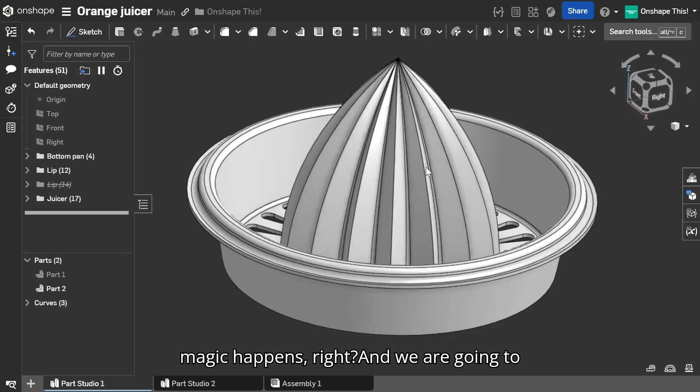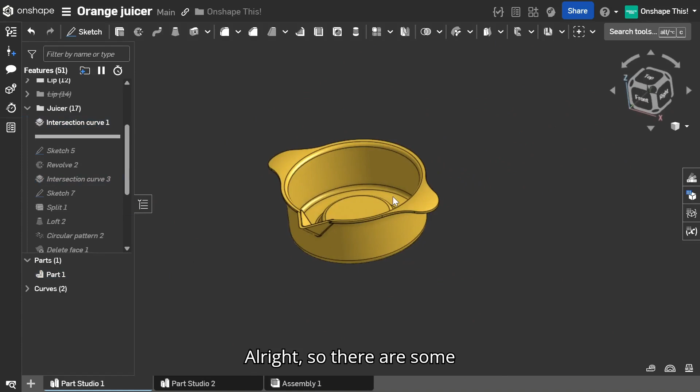Okay, so this is the juicer itself, this is where the magic happens, right? And we are going to be designing this together in Onshape. I'm just going to go back up in my feature tree here, like so. There we go. So there are some pretty complex features that I used here.

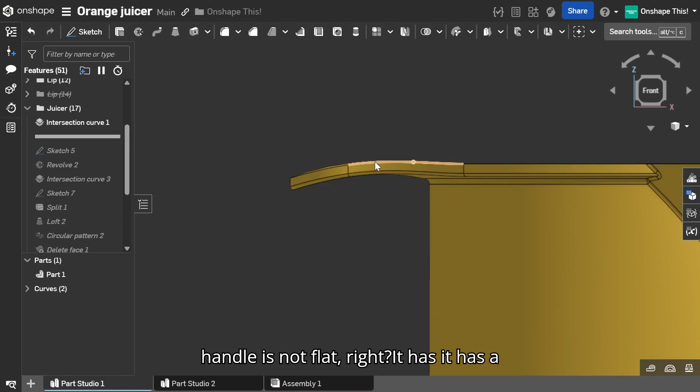Some of these are due to the nature of the design. If you notice, the handle is not flat, right? It has a curve, a slight curve, similar to how it looks on the product as well. So I needed some vertices or points to use, and I had to resort to using an intersection curve like you see here.

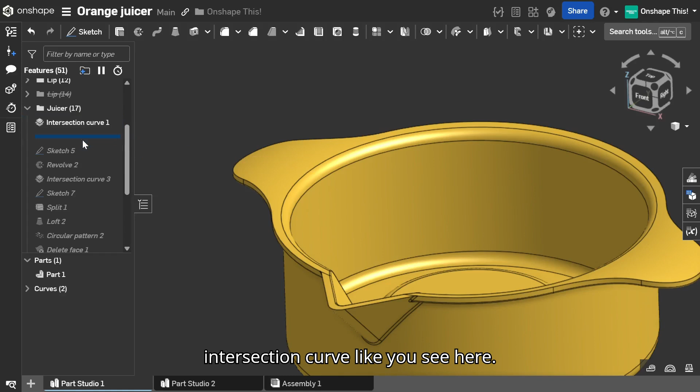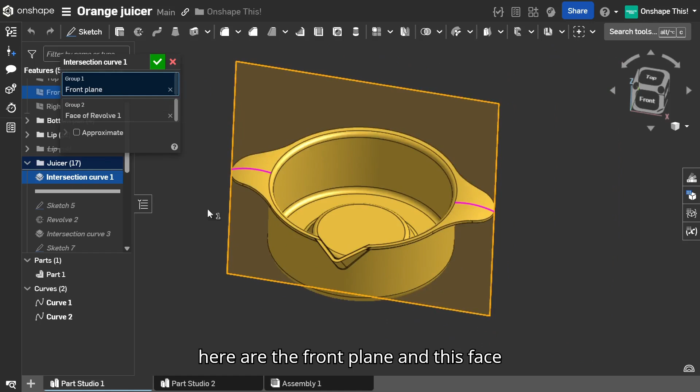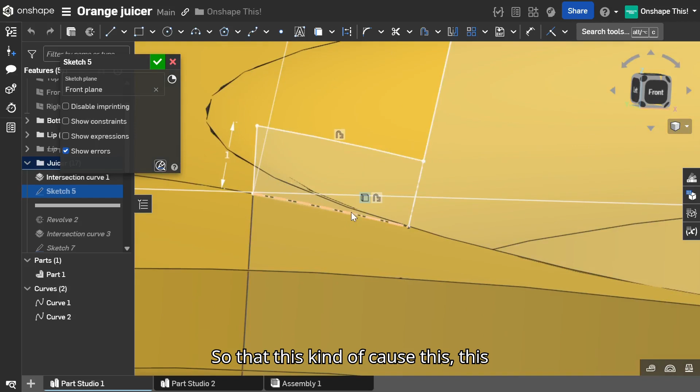Let me turn that curve on so you can see. What intersection curve does is at the intersection of two inputs that you give it, it generates a curve. My inputs here are the front plane and this face right here, and that generated this curve. I needed that curve for this sketch, because this here is an offset of this.

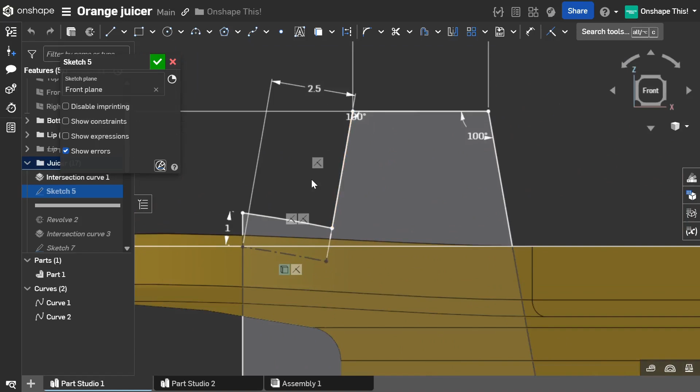Unfortunately I can't start from the beginning so as not to make the video too long, but you can try to follow the sketch. I'll try my best to explain what's happening. This is offset 1 mm, so that's why it's 1 mm. And we have this.

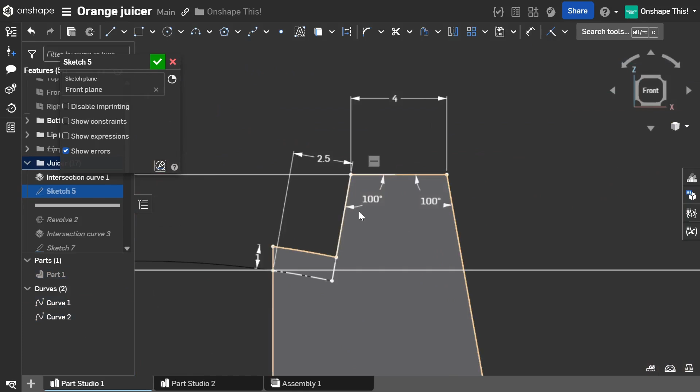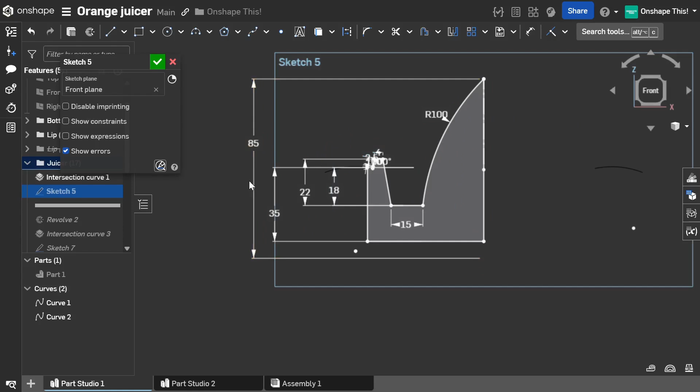Let me hide this part so you can see the shape clearly. 2.5, and this is 4. We have a 100 degree angle between these two lines and this horizontal, and the total height is 85 — I think we need to see where that comes from. Yeah, from the bottom of the pan to the very top is 85.

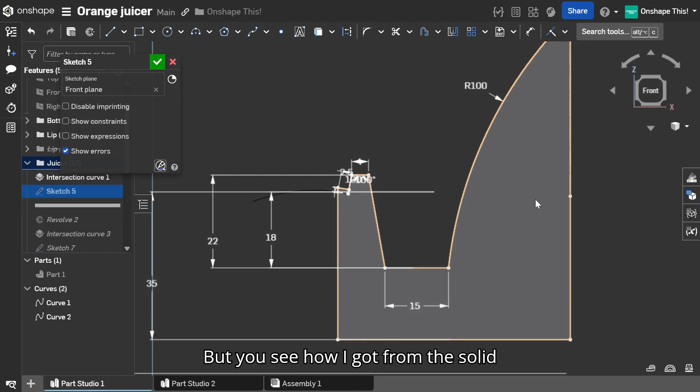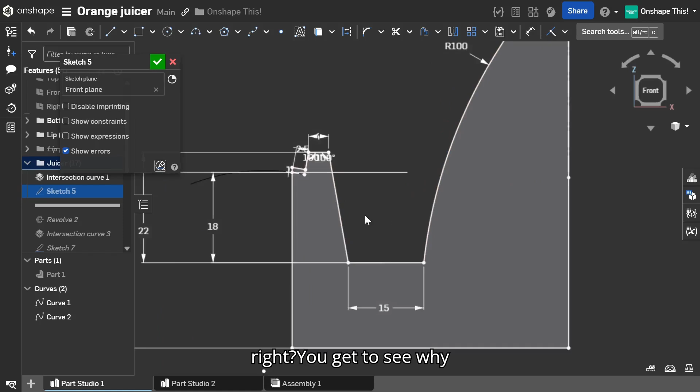I had to fill in all of this to make a solid, because I was going to revolve a solid. But you see how I got from the solid to the thin piece — basically a shell, but I wanted to use the shell command specifically. That's why I had to start with a solid, and that's why I did not just use the thin command initially. You get to see why later.

So this is a sketch, you can copy this, and let's get on with it. And we do a revolve — a solid revolve, basically. This is what we have. We hide the curves.

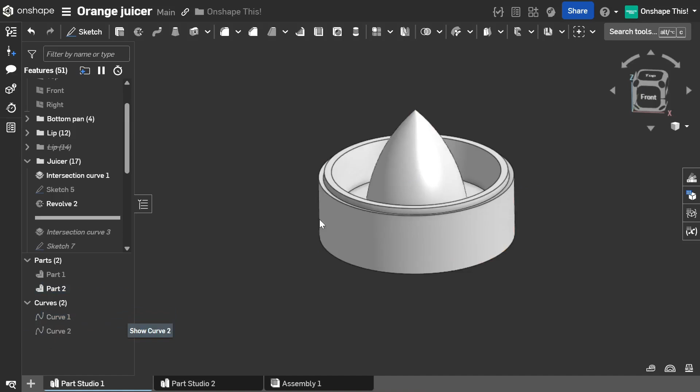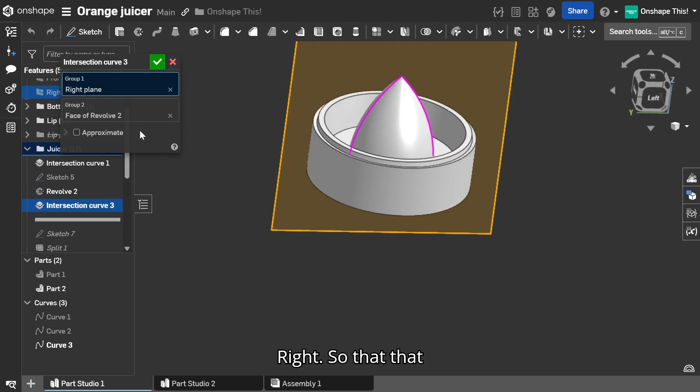And then another intersection curve, this time between the right plane and this face. That creates curves along, so that's that.

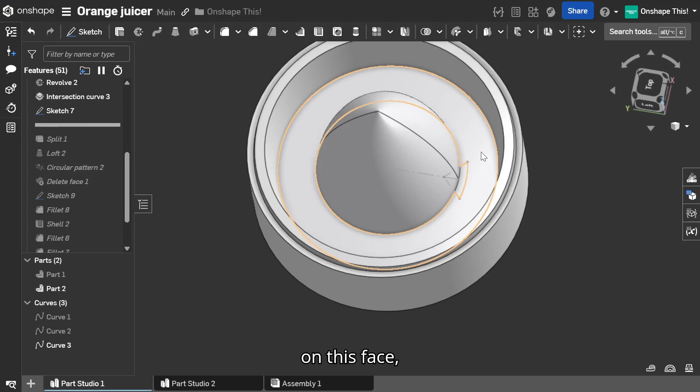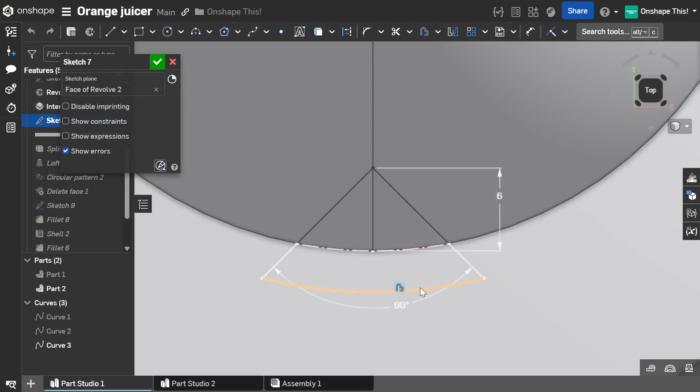And then we do a sketch on this face right here. So this is a triangle with a curved base. This curved base is basically an offset of this base here, of this circle, offset to here by any amount — it's 3 here. So offset, and then I trimmed out all the rest that I didn't need, so you get this triangle with a curved base.

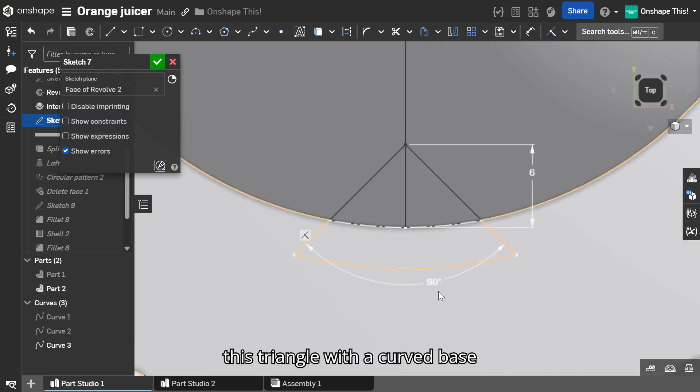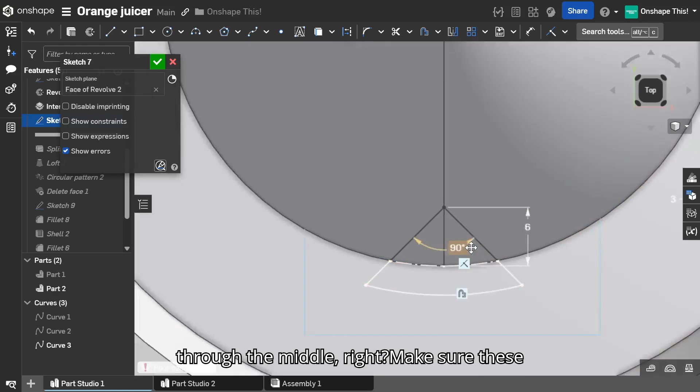90 degrees and then 6. At this point you can mess around with these dimensions — you don't have to use exactly mine, you can adjust them to however you see fit. But do make sure it is centered through the middle, make sure these are symmetric. This is a symmetry symbol in Onshape — make sure they are symmetric, and you'll be fine.

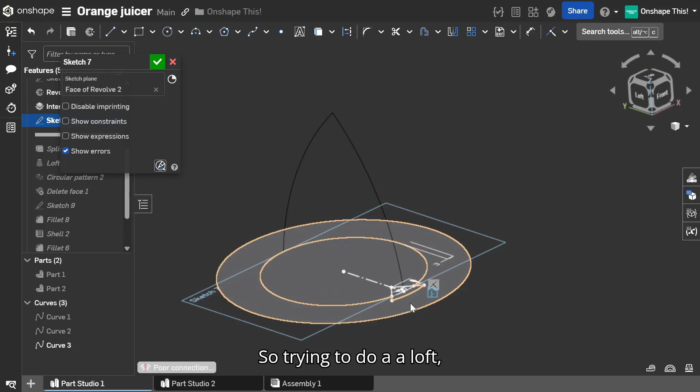Let me hide this part so you can see the sketch properly. You can probably tell what I'm trying to do already — I'm trying to do a loft, I think a loft in this case, to a point. That's what I'm trying to do.

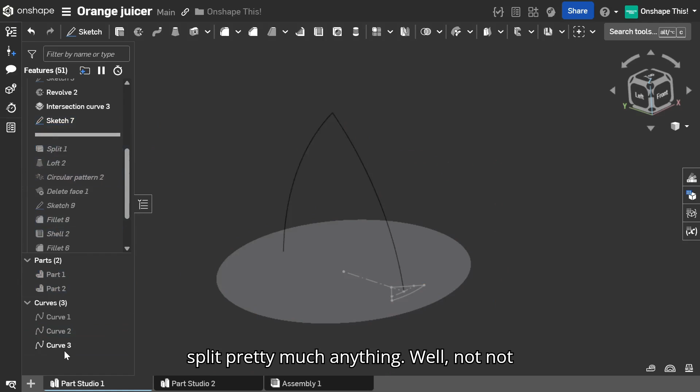So let me exit out the sketch, and I had to split the curve — it's wonderful that Onshape allows you to split pretty much any curve. This is curve 3, and you can see that curve 3 is a combination of these two curves.

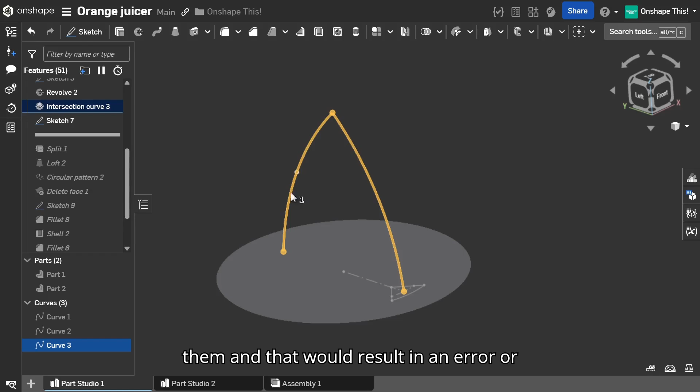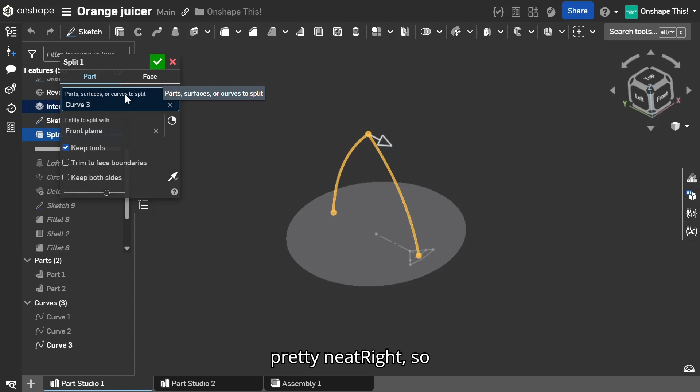So I don't want the two curves, because when selecting the curve for my loft or sweep, it would select both of them, and that would result in an error. So I just wanted one half of the curve, so I had to split the curve. I did that with a split using the front plane, which is fantastic, since Onshape allows you to split parts, surfaces, or curves. I was able to split the curve so I could just have this half.

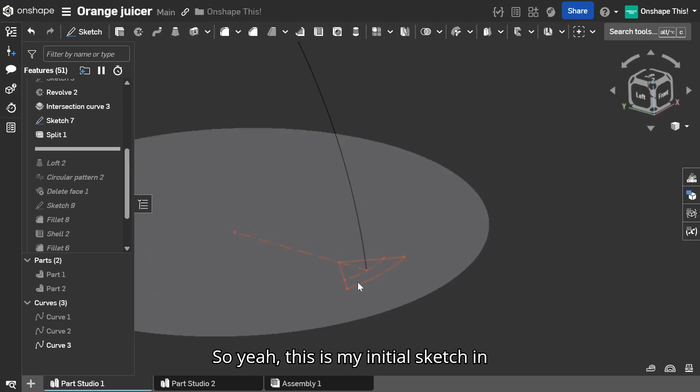Let me quickly change the color of this so you can easily visualize it. Let's say red.

So this is my initial sketch in red, and this is my curve. Now I'm going to do a loft. Let me hide this. Alright, so this is a loft.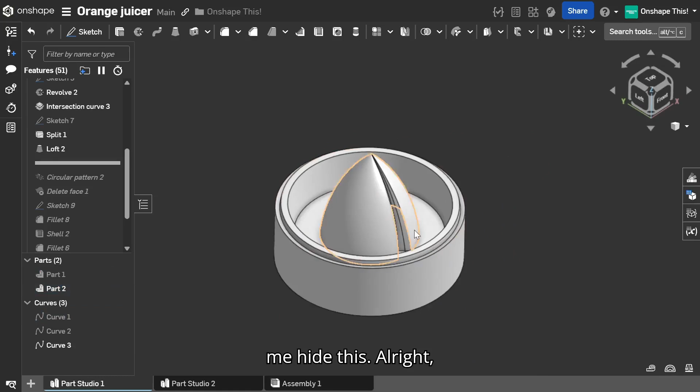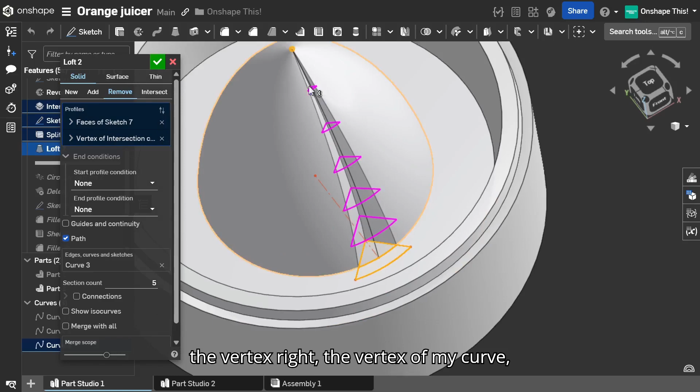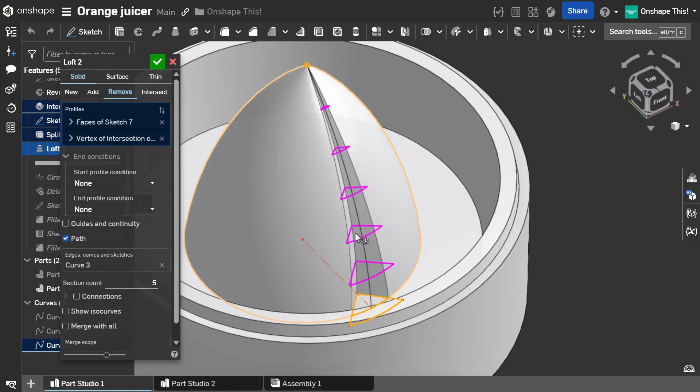It's a lofted cut, so remove, and then it's the sketch, or these two faces, or the sketch, whichever one you choose. Then I'm lofting to this vertex, the very top point of my curve. This is very important - I didn't use guides and continuity, I used a path. I selected the curve as my path, and that's how I basically created that loft cut.

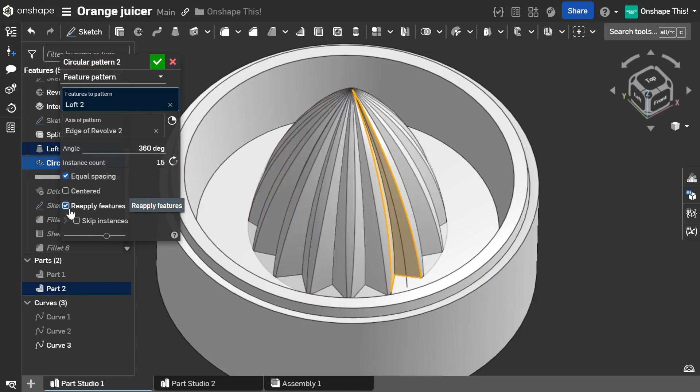Then I patterned that across the faces. So feature pattern, then any circular axis - you could use any circular axis around you - and 15 instances, 360 degrees. Make sure you tick reapply features, or it will not work, and make sure equal spacing is ticked as well, then click OK.

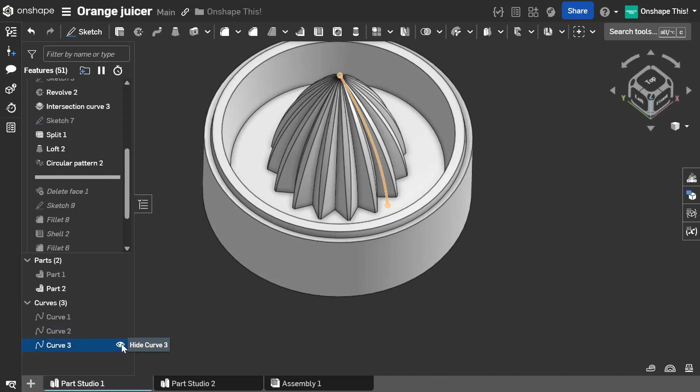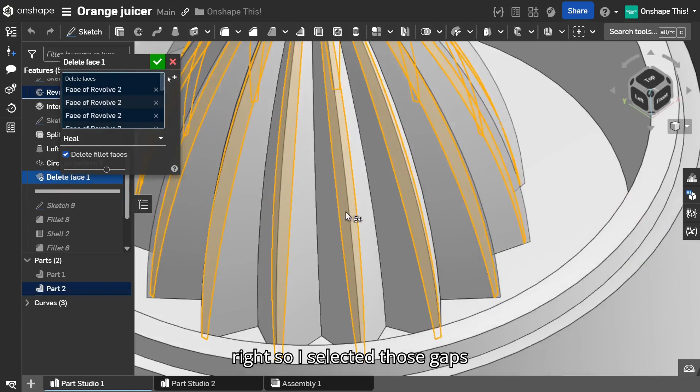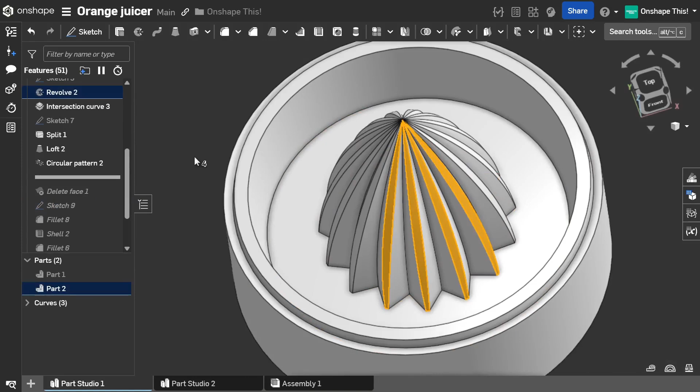So I needed to try and solve that, and how I did that was with one feature - delete face. I selected those gaps in between those faces and just deleted them, then selected the option heal, which removes them. You can see the transition - this face, these were the faces I selected, and with delete face it turns to this.

So this is a lot sharper, right? That could probably help with, you know, squeezing the juices out a bit more.

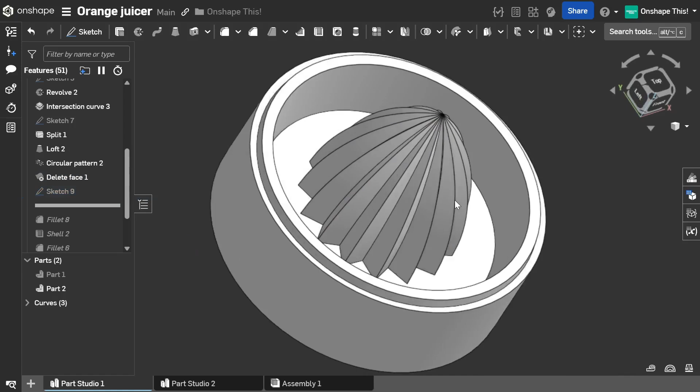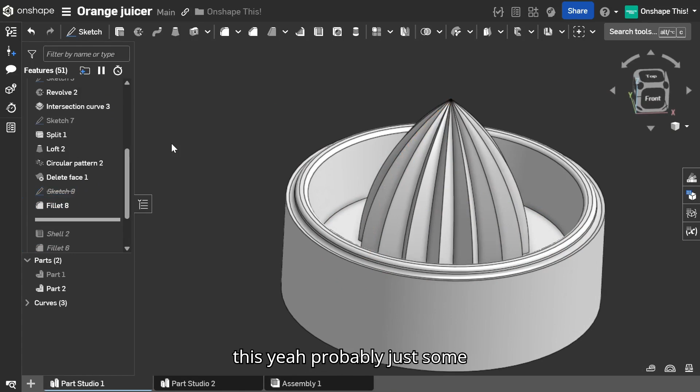Next I fillet. I think this is just some random sketch I did - let me suppress this. Yeah, it's probably just some floating sketch, not really connected to anything.

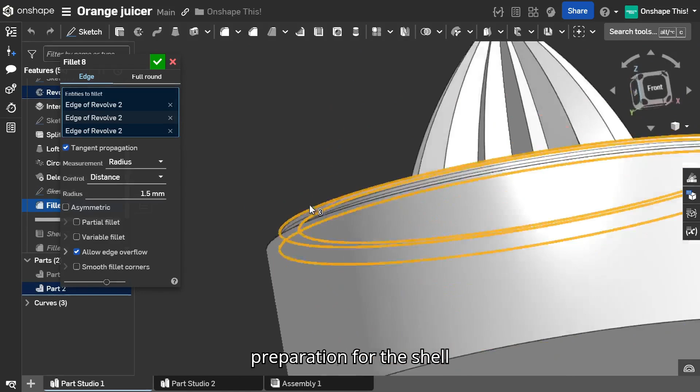So next thing is a fillet on these faces here, this one and this one, in preparation for the shell. And we do the shell.

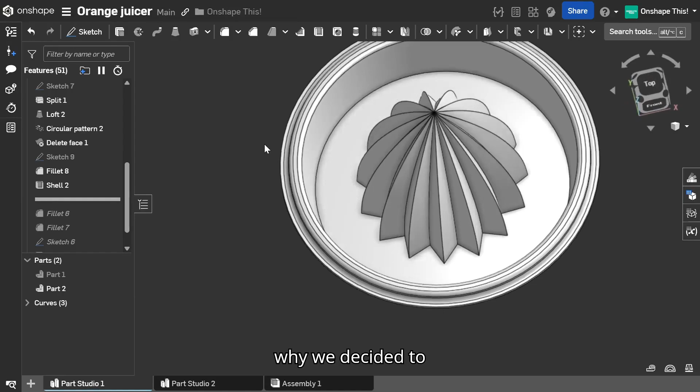Alright, so this is our shell, and you can kind of see why we decided to go with a solid first, because that would pretty much help us have even thickness around when we now do a shell.

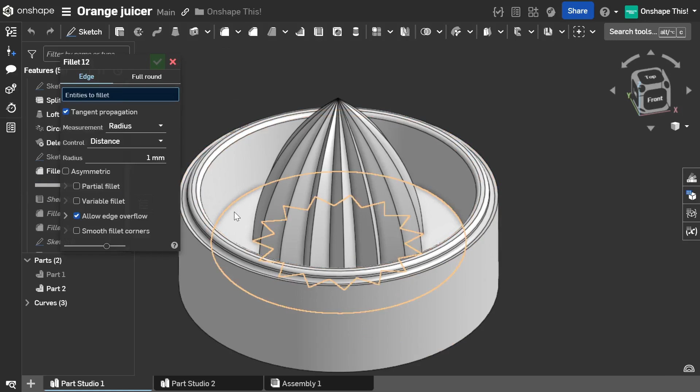So before the shell, I think I would like to add a fillet. I generally like to add my fillets before the shell, so I think I should do that as well in this case.

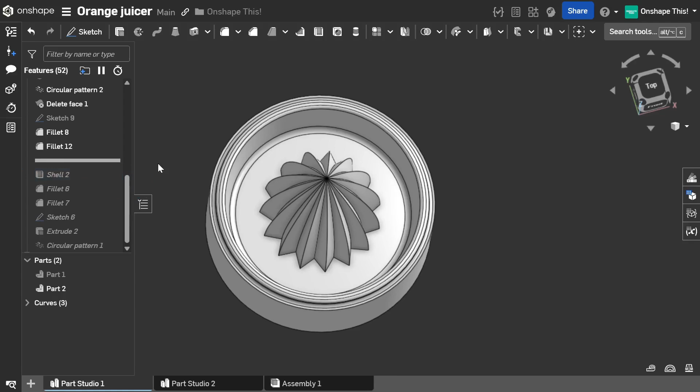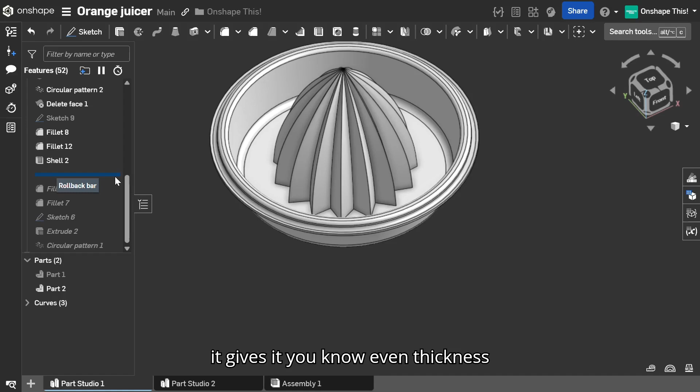Let's see. Okay, and that produces the fillet on the outside too. What that does is, when you do your fillet before your shell, it gives it even thickness all around, which is important for plastic part design, injection molding and all the rest.

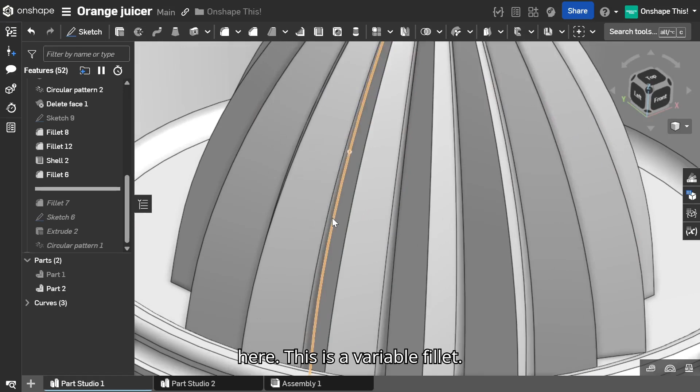I think I did some small fillets here. This is a variable fillet - I have to select all of those edges, and at the very tip they are zero, they have zero radius, but as they go down to the end, they all have a radius of 1mm at the very end. So that's how variable fillet works.

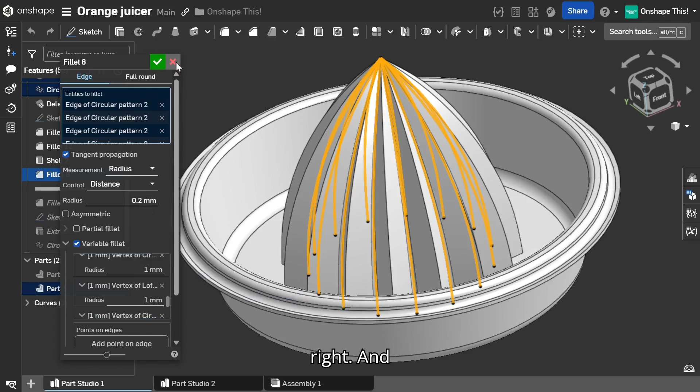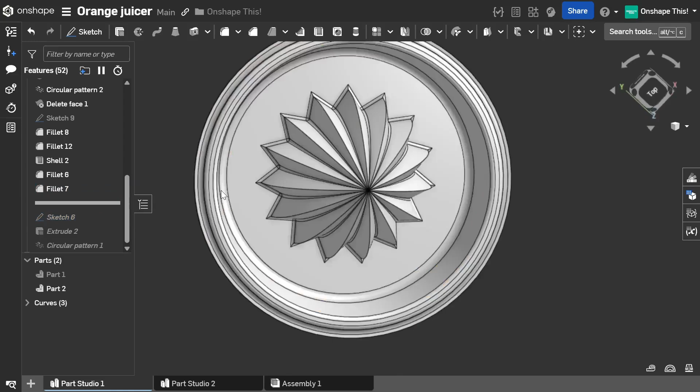Since this fillet is a very small one, I think I can afford to keep it before the shell. And another fillet here, and yeah, what else? Okay.

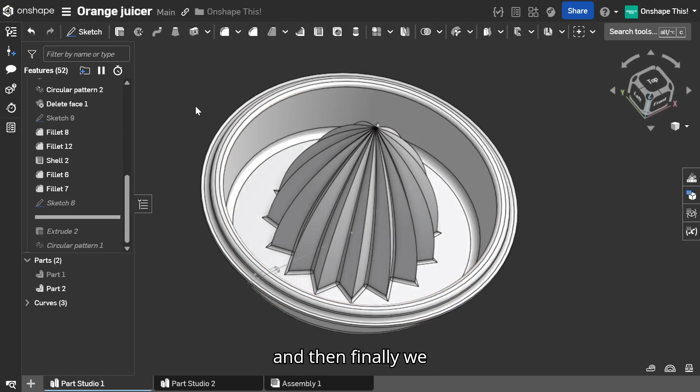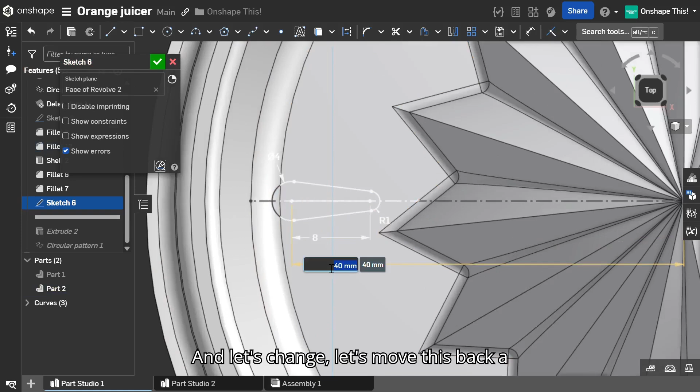And then finally we have these grooves, or these holes. I think I need to edit that because we have an error. Let's see, and let's move this back a bit to like 35. Okay, that's too much, let's make it 38. Okay, I think that's fine.

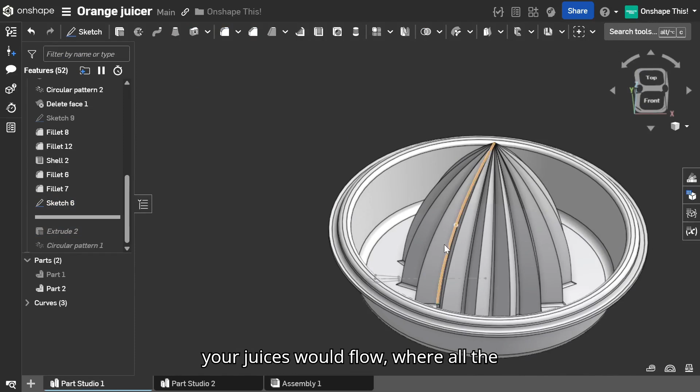So that cutout is where all your juices would flow, where all the juice would flow into the bottom pan.

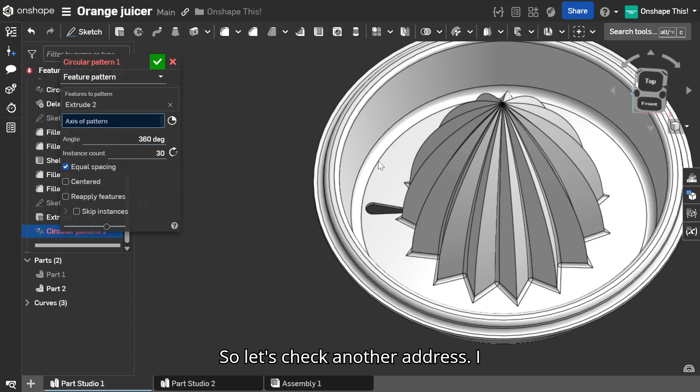We cut that out and we pattern that. So let's select another axis. I think we have these errors because I had done this fillet right here after, so I now decided to change it to before. So we have this.

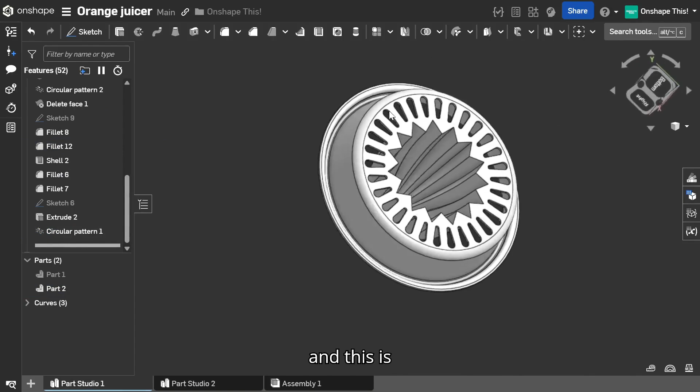And this is it - we are done with the juicer itself, and it looks very nice.